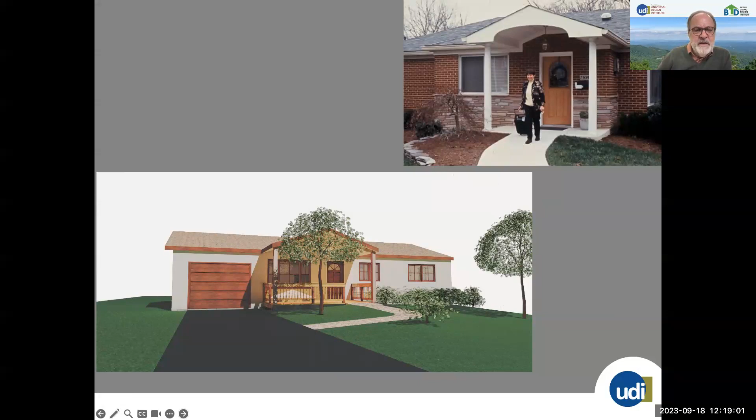At the entry itself, you need to keep in mind size, and the people and equipment they might be using, as well as the fact that as an older adult, you don't want to be standing on a sloped surface. Providing an adequate latch side clearance and at least a 5x5 space that's a level platform, clear of other obstructions, is really preferred, both outside the house and inside the house.

Again, there's not that much in the way of doors and doorways inside ADUs, but we're using this as a reminder. I'll mention it again in a minute.

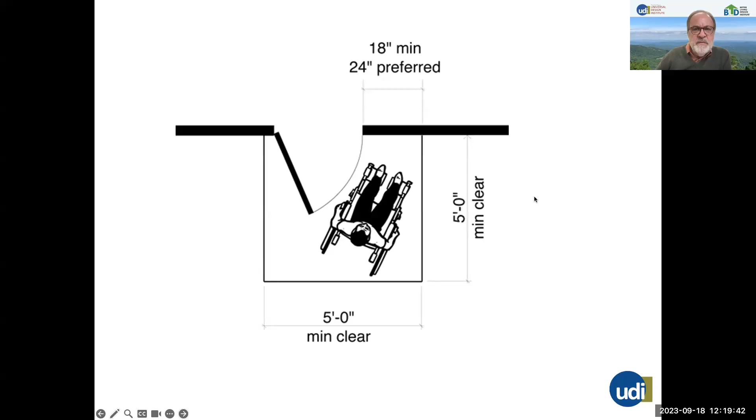Here's a renovation. We're not calling for renovations in this competition, but it looks like this is a garage renovation. As a result, it does have a step-free entrance, as you can see. It also has a kind of small roof overhang, not really the size I think would be most beneficial, but it does have at least a small version of this. So step-free entrance and roof overhang are these two important elements to provide.

Universal design is realized at both large scale and small scale. This is taken from one of our other publications that deals with renovations, but it shows the outside decking coming right up to the sill plate of the threshold, and a very low profile threshold as well. This is the kind of thing we're looking for, that your client would be best served by, if designing something for an older adult that was universally and age-friendly designed.

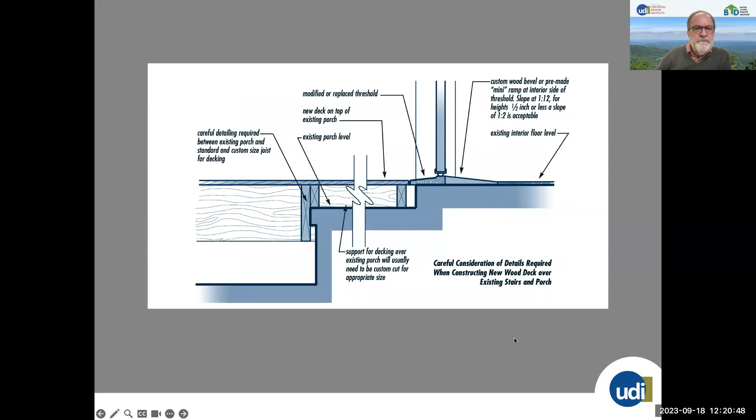What we're not looking for are ramps. I've designed, built, and funded hundreds of ramps around the country, so I'm very familiar with them. I know they're unavoidable in a lot of renovation situations, but for this competition, we're really not looking for ramp solutions from folks. We really hope that you can emphasize the graded entry as much as possible.

So that's the end of our very few requirements outside: emphasis on graded entries, not ramps, and adequate maneuvering space outside.

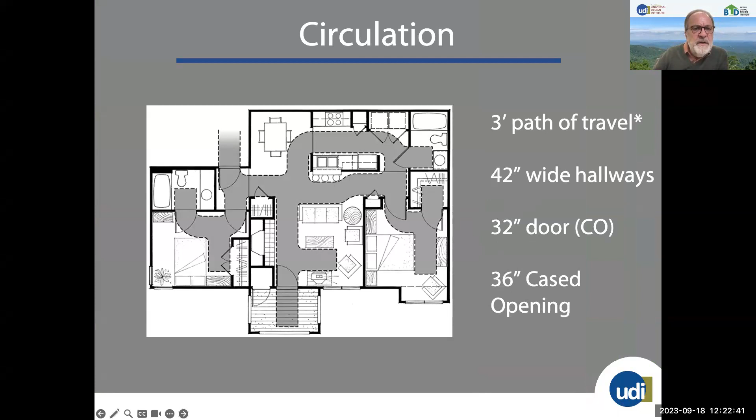Inside the house, again, these are very small dwellings, and this is not an image of an ADU - you'll see plenty of those coming up - but it emphasizes some of the things. We're not requiring a 3-foot path of travel, but that's always good to keep in mind. Again, very few hallways, but 42-inch wide hallways, and not that many doors, at least a 32-inch wide door. And if you have cased openings, at least a 36-inch wide cased opening would be required.

So if you're using a barn door or sliding door, pocket door of some kind, I think it'd be at least 32 inches wide in the opening is what we're looking for.

And again, the same kind of latch side clearance, especially on the pull side of the door, 18 to 24 inches.

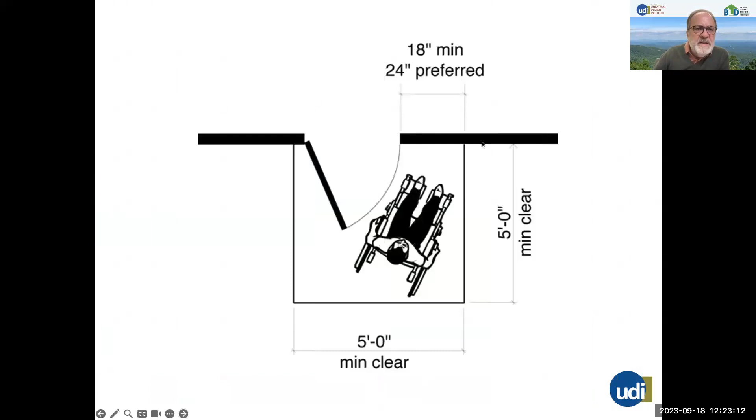And you may not have any on the inside. You may use exclusively pocket doors and save yourself some swing space. Again, very few hallways in accessory dwellings, but if you've got them, minimum 42 inches. This is a small-sized ADU. In this case, we used pocket doors to eliminate the door swing and to maximize the interior space in rooms, particularly in the bathroom.

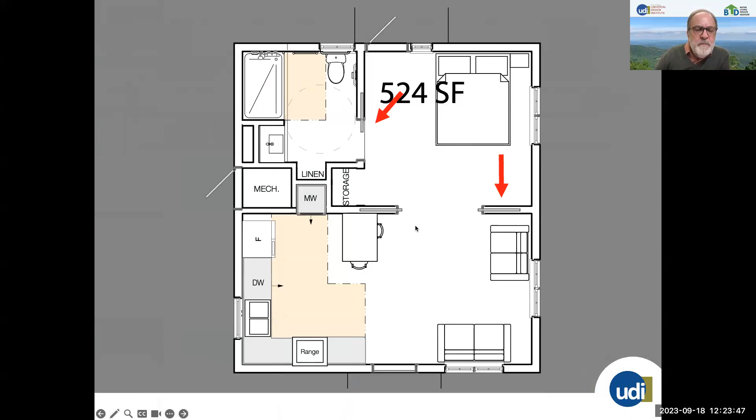And windows wind up being another big deal. It's one of these areas where we're talking about maximum heights on things. So we don't want to have hardware above 48 inches, and we'd like to have controls that are easily operable on the windows. This typically takes single or double hung windows out of the running. Although, I'm happy product design marches along every year, and we don't always keep up. So if you find some unusual window design that works well from an operability perspective, we'd love to see it.

So moving into bathrooms, adequate maneuvering space inside at the key fixture locations is important. That's not kind of a stretch there. We're looking for, in particular, space that's around the toilet, space around the toilet that's appropriate in size. And we'll show you some examples here where it works out. There's a lot of ways you can achieve this.

In this case, this is again a pretty small dwelling, really kind of a studio apartment size thing, where you've got a good bathing fixture. We like step-free, curbless, low threshold showers. It's got a toilet in the corner, but it actually shows 2 grab bars installed.

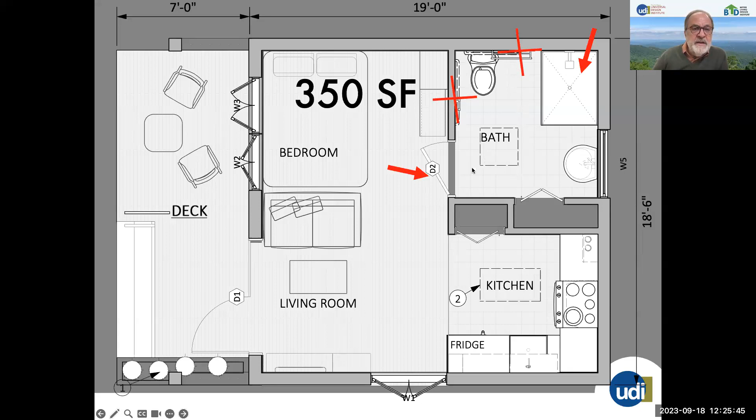But this has all the adequate space that you need around here, as well as space next to the fixture to access the controls easily. And it also has this out swinging door, which provides even more usable space inside here. You're not fighting the door swing as it swings into the bathroom.

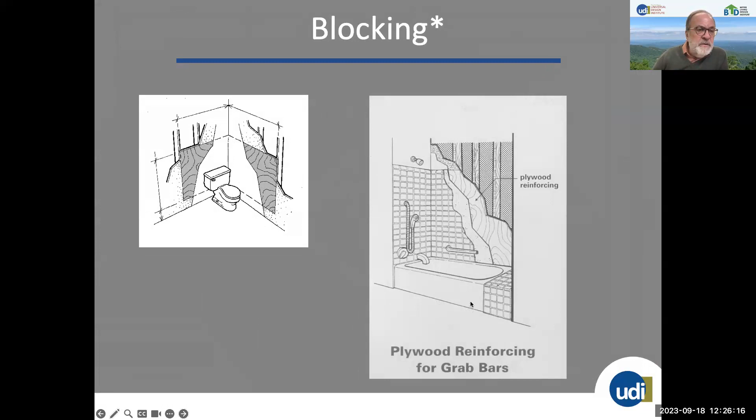We do want blocking. This is the kind of blocking we don't have to show in terms of cross sections, but you need to be mindful of this. This is the kind of blocking we're looking for in bathrooms. Sheet product, 3/4 plywood, around the toilet area and in the bathing fixture, regardless of what you've got. So the grab bars can be installed wherever they're needed and not needing to be arbitrarily located according to where the studs are. That's an important thing to keep in mind.

And we're not requiring any detailing on interior bathroom accessories, but the thing to keep in mind is that if you were designing this for a client who maybe didn't need a grab bar right away, it would be great to include these dual purpose fixtures that are becoming more and more popular these days. In this case, it's this dual function towel bar with a handhold on top and the towel bar function down below, or a soap dish that does double duty as well. All of these firmly and securely mounted into the wall. If you've got the blocking, people can mount this whenever they want to.

We're also not requiring that you specify toilet type, but we thought we'd mention this. Is this for future reference, perhaps? Or you could choose to include this. Comfort height toilets are really not necessarily a universal design standard that lots of folks would choose. They're an interesting option. In other kinds of dwellings, if you've got 2 bathrooms, having a high toilet and a standard height toilet would be terrific.

In this case, it would really be up to the client as to whether they could use a higher toilet conveniently and safely. Not all older adults can. Sometimes a higher toilet, if you can manage it, helps when you're using the toilet for some older adults. So that's a thing to keep in mind. And it's easier, obviously, to get down onto and up off of.

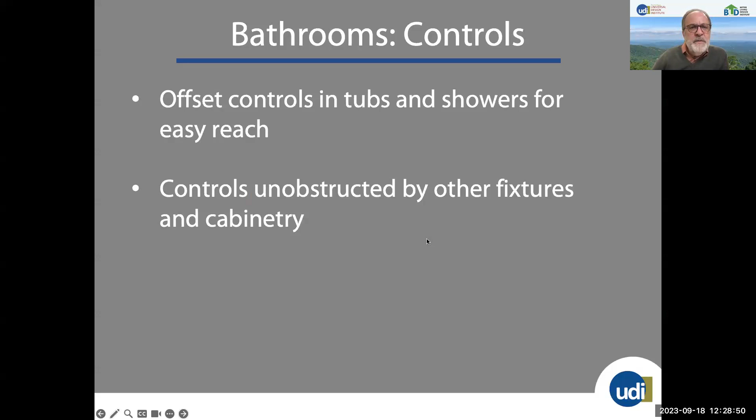So continuing on, control locations matter. I may have shown last week the circumstance where someone, even if not using a wheelchair, gets wedged next to a toilet in our standard bathrooms, put into an awkward position both balance-wise and reach-wise. Locating controls and bathing fixtures unobstructed by something adjacent, like a cabinet or toilet, and then offsetting them, can make a huge difference in safe and independent use for much longer.

So that's our talk on bathrooms. Now we'll move into the laundry area.

So again, it may not be possible to put a laundry in every accessory dwelling. It seems like the sizes in this competition probably will allow something, but making sure the space is accessible and the laundry fixture appliance you're specifying is more usable will make a big difference.

The gold standard is the side-by-side, floor mounted, front control, front loading washer and dryer. This provides easy access to the controls, easy access to seeing and manipulating them. They're front loading, so you have easier access than having to reach down into the top of a top loading washer.

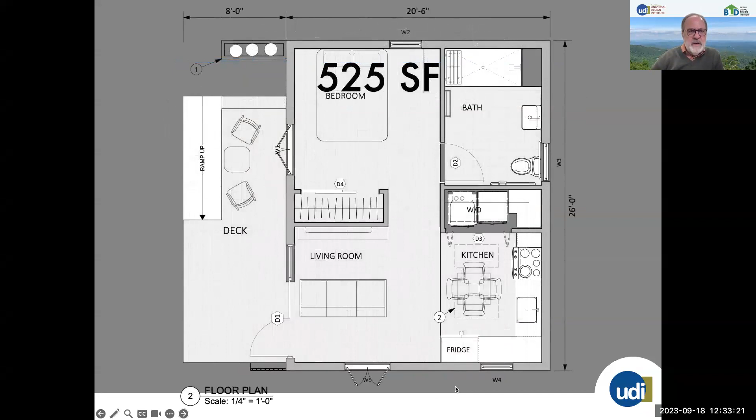Let me see if I can get this to advance. There we go. Again, back to our 525 square foot model. You can see in some of these small units, it may be a challenge to figure out how to work seating and a dining table and dining functions into a kitchen.

This seems like, while it's interesting, probably not something that's going to survive very long in use, because the kitchen table and chair is going to be blocking really any significant access. Whether you feel like you can duplicate kitchen table and dining functions elsewhere, whether you choose to expand the floor surface of the kitchen into what might be the living area and move the table out, or choose some other option, might be of your own choice. Might be some interesting things to be thinking about there, but this looks like it's not that workable in a real sense.

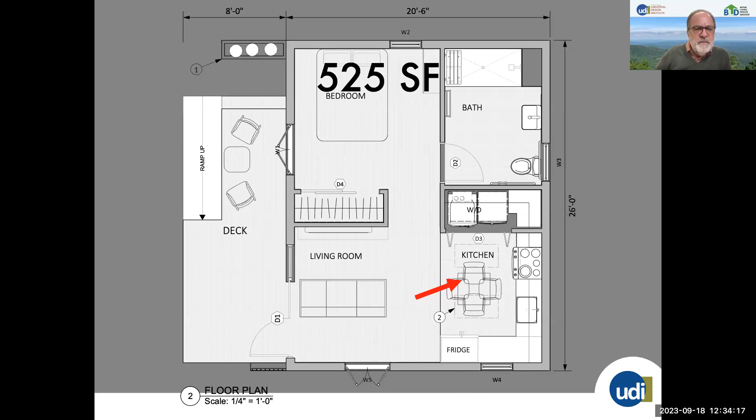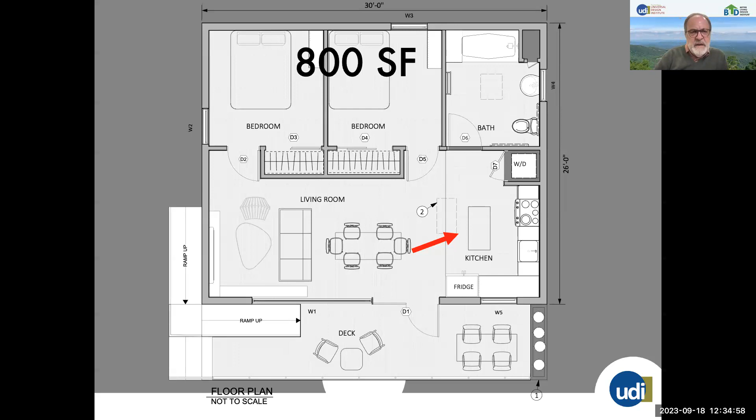They also included what looks like this over-under washer dryer situation here. Again, not optimal from an ergonomics perspective, but maybe with these small dwellings, the best that can be done. We'd love to see what you come up with.

In terms of other elements of the kitchen, we'd love to see drawer-based cabinets as opposed to base cabinets with doors. Older adults don't like getting down on their hands and knees. They have a hard time getting down on their hands and knees, fishing things out of the back of cabinets. So if you can eliminate them as much as possible, that's a terrific idea.

We also like to see cabinets that have usable controls, so loop handles, touch latches, things like that would really make a difference in terms of the usability of these.

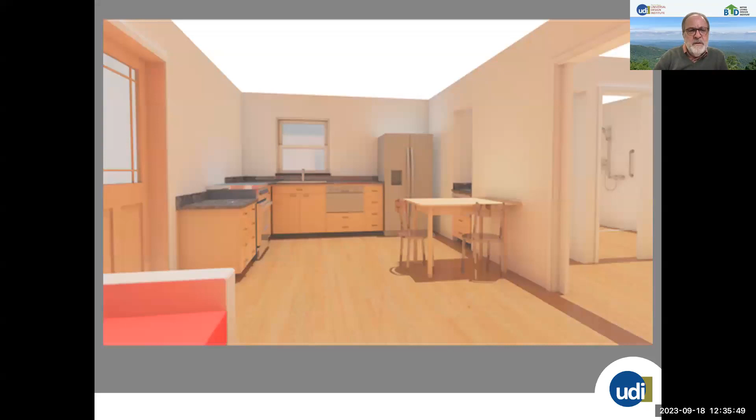In this particular kitchen, we played around with the idea about how do we eliminate these problematic areas, which we talked about last week, which is storage high in wall cabinets and people having to reach up too high to get the stored items, or even operate dangerously to get these items. So we experimented with this kitchen design.

Here's a kitchen with a shallow under-counter dishwasher that doesn't require that you reach down so far. Again, in a small dwelling, this may be just a perfect size to accommodate one person.

We have the drawer bases in 3 different locations. We did include a lowered work surface. It might be the surface that you put the microwave on, although the table that's in the kitchen could also serve as that lowered work surface as well.

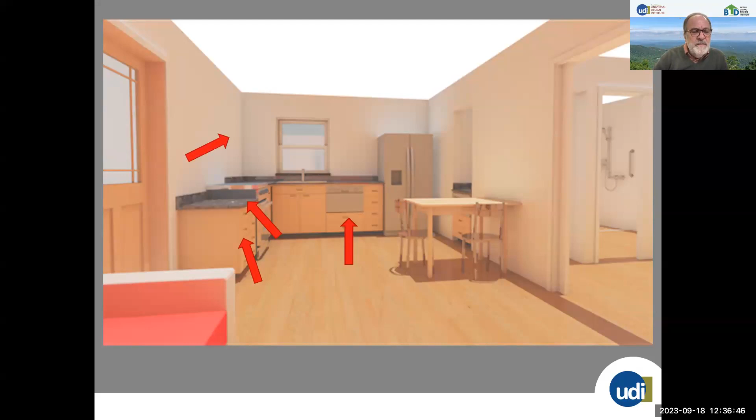As I say, we eliminated wall cabinets. You could easily add some back, maybe not even full height wall cabinets, so you can provide that storage at a lower level.

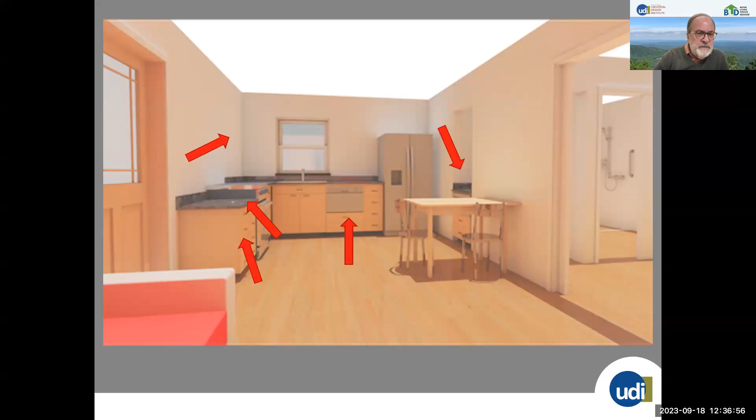We did include an alcove here, and you could put the microwave there, or other kinds of storage. We have a drawer base in there now, but you could put our favorite kind of storage in there, which is pantry style storage, which can go up higher because you've got so much lower storage that's also available. There's a lot of different varieties of pantry style storage, higher end and more affordable versions as well.

When you're thinking about kitchen appliances, front or side controls, we're pretty consistent with that. And in terms of any wall mounted appliances, making sure again that those controls aren't any higher than 48 inches, including microwaves. So this is just one of many varieties of electric front control ranges.

We know these days that induction stovetops seem to be the gold standard for safety, since they don't have hot burners, but the front controls limit people's need to reach over hot cooking items, since the controls are at the front. Again, just like with the washer and dryer, you can see them more easily, you can manipulate them more easily. They're right at the front of the unit.

Or you could even, there's another option for ranges we've seen, which is the 2 oven option, where the top oven, kind of like the dishwasher we showed, isn't so deep. You don't have to reach in so far, down so low to operate it.

This shows one location of a microwave, happens to be on top of a counter in an alcove. And this shows one kind of configuration that might be workable.

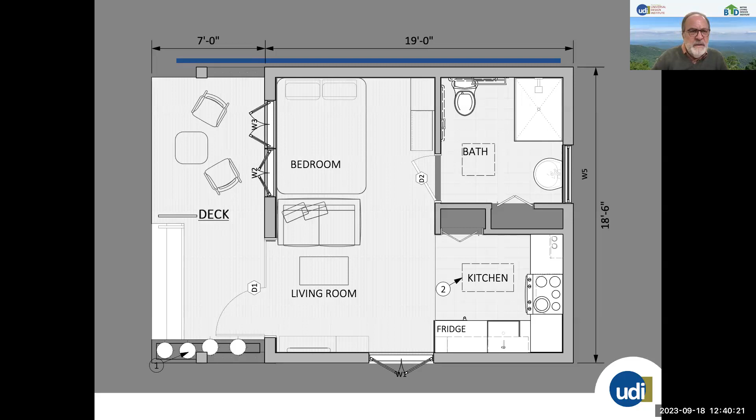And in these small dwellings, it's a real challenge, right? We'll talk about some other options for how to maximize utility of space in a minute. But think in terms of that.

Same thing for the bedroom. We need to be able to anticipate the need for folks to have additional space needs adjacent to beds and around beds. So allowing for some aisles on both sides, at least one side of the bed, and between the bed and the furniture is important.

And then maximizing storage. It's kind of the same thing with the storage in the kitchen. It's maximizing the storage in the 18 to 54 inch reach range.

So this is a slide we borrowed from a long ago slideshow for emphasizing a particular product, but it shows you the space next to a bed if someone were to use a wheelchair. And it shows how these bifold doors can be a problem.

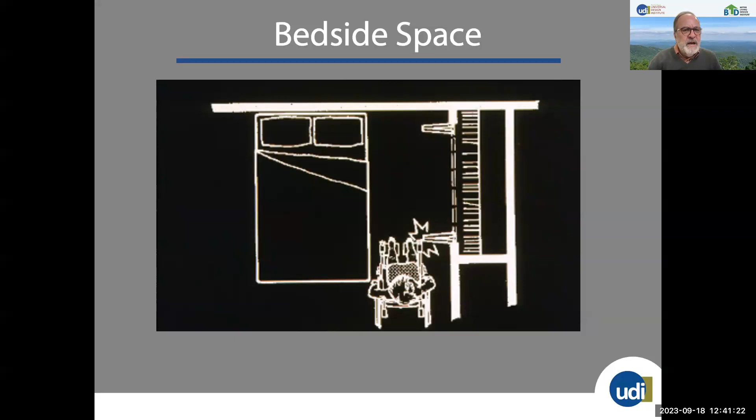There's a great product from years ago where they allowed the bifold door to fold flat back against the wall, but whether you have bifold doors or not, this just shows the kind of space you need to be accounting for, about 3 feet in width to allow for maneuvering.

I mentioned kind of what might be some interesting product selection in the window area. There's a lot going on now in this old style.

I don't know what they call it, appliance or a home feature, but Murphy beds that fold up into a wall, whether they're coming back again—they've always been around, and I just haven't noticed—but they seem to be proliferating these days, I guess, with smaller dwellings.

There's a lot of different design styles that include work surfaces and couches on the underside, and it's really interesting stuff. And even beyond that, these high-tech moving walls, or higher-tech moving walls, that can then convert space from one use during the day to another use at night, kind of creating a bedroom space by rolling this wall out.

And again, finding these kinds of products that might work well for older adults, might work well used by older adults, would seem to be key. So we'd love to see some interesting designs in this area as well.

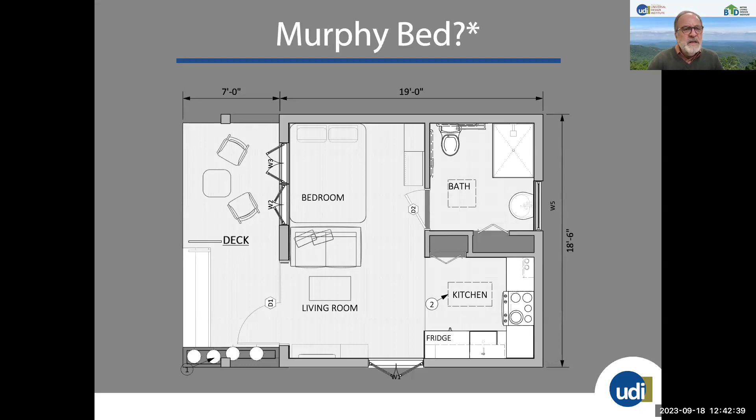So we talked about a lot of the physical space stuff. Now there's other qualities here in terms of indoor environmental quality. We know that more attention is being paid in recent years, not just in home environments, but in office environments as well, to the kind of air quality inside.

And there's a lot that could be done with HVAC equipment, but choosing products at the front end that limit off-gassing can make a big difference. We know that older adults experience higher levels of respiratory issues, and paying attention to that in the design, I think, would make sense.

Lighting is another area where we know that older eyes need more brightness. Layered lighting is one way to do that. You can't layer lighting everywhere, and a lot of the task lighting can be consumer purchase lighting, lamps, table lamps, and so on.

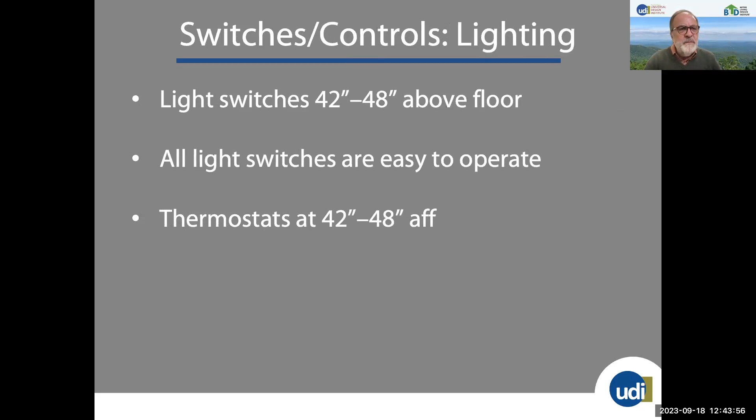But think about layered lighting in cases where that's proper, to add additional light where it's needed. So switches and controls matter. These small details, where light switches are located, easy to operate light switches, where thermostats are located, again matter a great deal. This shows you a bunch of the possible vertical orientations of some of these various switches.

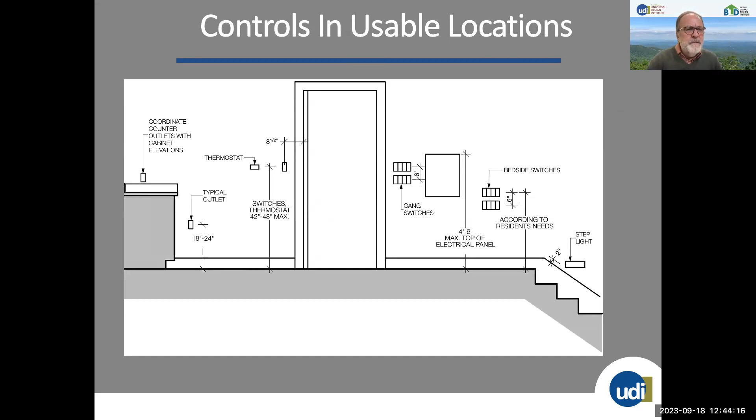Outlets no lower than 18 inches. All other operating controls no higher than 48 inches, including the electrical panel, always something that's kind of forgotten about. It needs to be in a location that's accessible and reachable, with floor space in front of it and with mounting height kept in mind.

This just kind of reiterates part of what I've said in terms of the heights and locations of outlets and controls. Additional outlets, I think, matter a lot in our lives. Older adults might need medical equipment, for example. All of us are using more and more electrical items and appliances, including adding an outlet near the toilet in the bathroom for the possible future installation of a bidet, which again can help with hygiene. And if you're having trouble managing hygiene, it can make a big difference in your life in terms of being independent.

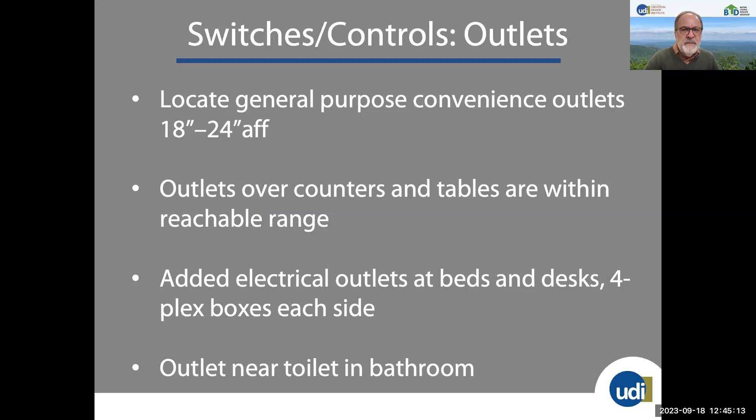But they seem to offer a lot of functionality where you can use them with your hand, with your finger, with your elbow, in some cases with your hip, to operate the controls with empty hands and with full hands, or hands that can grasp easily or not. So we love those as examples of easy to use controls.

So whole house functionality really comes down in this circumstance to maintenance issues. Low maintenance items outside, particularly low maintenance decking and cladding, meaning that you have to paint or stain infrequently if at all, can make a difference. One of the advantages of older adults moving into an accessory dwelling in many cases is the downsizing possibility and the lowered maintenance that offers. We think that needs to be continued through some of the product choices in those areas.

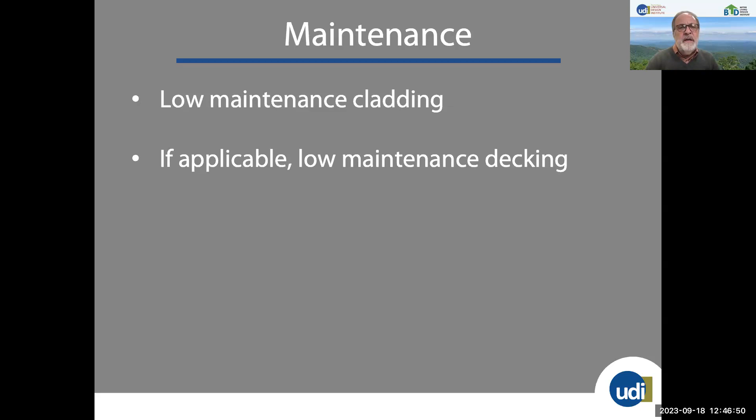We think that if you include these and others, if you choose to, of course you could go beyond this, that you'll have a house that results in something that's much higher function than traditional housing, that really emphasizes someone's ability to live in the house. From an individual's perspective, this can be a real benefit because you can delay moves to expensive care settings.

We talked about universally designed accessory dwellings being more affordable than traditional housing. We can also save money at the same time. We think that because of the design of these dwellings, individuals and even their caregivers can experience fewer injuries. Stairs alone can help with that. Bathroom design, where other falls happen a lot, can help with that as well.

It's physical health. It's also improved mental health. If I can maintain my activities of meaning and purpose and my connection with family and community life, I'm going to be a happier person with improved mental health. And it provides us really with more choices. Choices are part of what this is all about.

I don't mind if someone comes to shovel my walk. I may mind more if I need help in the bathroom. Living in houses like this allows us to maintain those kinds of choices for longer into our lives. As I mentioned, part of the flexibility of this is that the customizations you may need to make, which we'll all need to make, will be much lower cost than otherwise traditional kinds of housing. And to the extent that it matters in a person's family's particular circumstances, they're also more marketable.

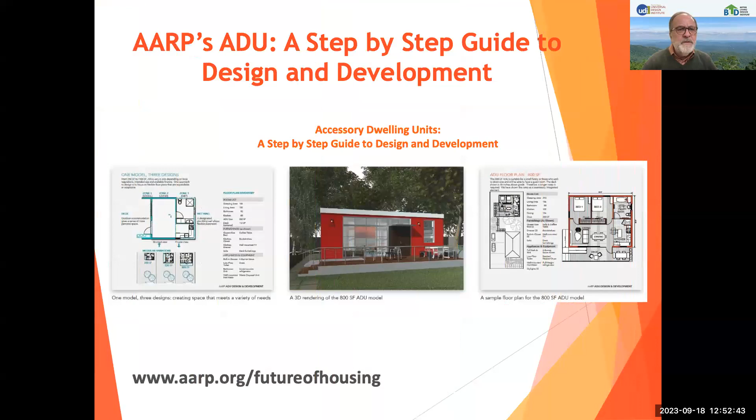We have a whole variety of resources there, whether it's infographics on our own Better Living Design criteria, resources on adapting houses or otherwise. And in AARP, again, all these are reachable through the landing page. It has a variety of resources that deal with accessory dwellings, including the ABCs of ADUs, a very interesting step-by-step guide to design and development. This is useful for a lot of folks, particularly people who aren't that familiar with the development process in many places. So it has design ideas, some of which we've shown you today.